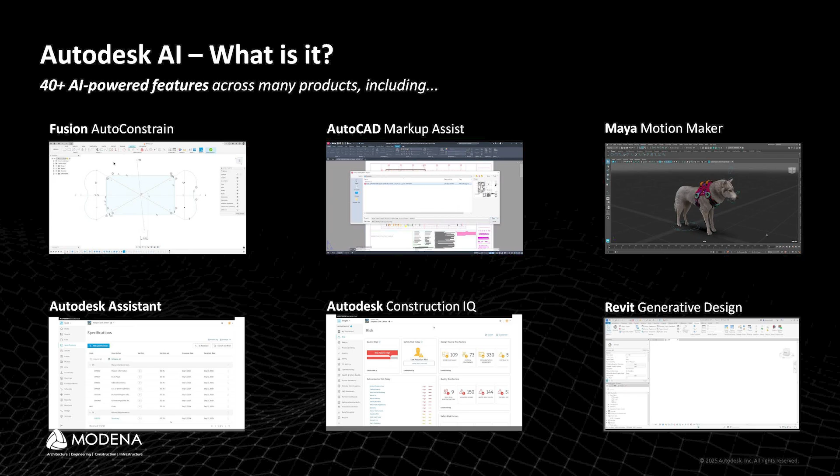The mission really is, as a trusted technology partner for years, to harness the power of AI on behalf of you guys, and a duty to do so responsibly. Over the years, you can see on the screen we've had multiple tools, which I will go through some of them, where we've made use of our design tools and authoring tools and pairing it up with AI. Okay, can I get to the fun stuff? Yeah, okay cool.

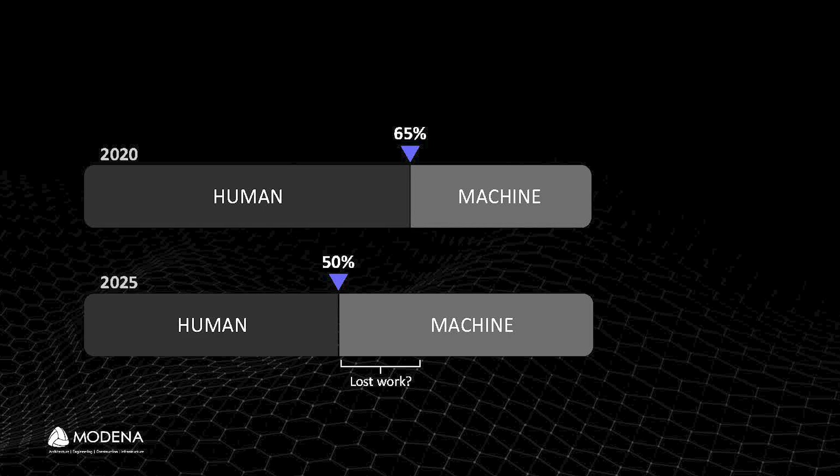What's interesting for me is that from 2020, when it came to design, as humans and designers we relied on AI maybe 35% when it came to our output. As we get more used to AI, most of our workflows become 50-50: human input and the other 50% technology.

And technology isn't just drawing a line and walls in an authoring tool, but giving correct prompts to get a specific outcome from it.

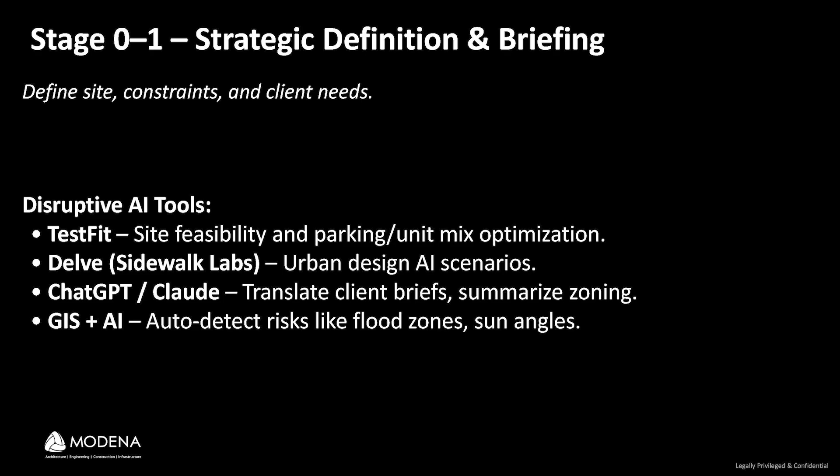In the first stage, when it comes to defining your brief and getting your concept together, the disruptive tools I've highlighted here include one called TestFit. I'll show a bit of that. I also spoke about ChatGPT, Sidewalk Labs, and there's also a platform called Architechtures.

During COVID times, I was lucky to work with a developer doing affordable housing. The guys would spend almost 6 months just value engineering a design that works for what the client is looking for. Getting the brief right and getting it to work is actually quite tough, much tougher than getting the documentation out.

So years ago, let me show you this, connect this thing. I hope it doesn't disappoint me. Let's do this. Perfect. I'll talk over it.

It's a platform called Architechtures. If you want the website, it's architechtures.com.

The idea with Architechtures is for you to get onto a site. You guys can see this, right? Okay, let me just... can't even fast forward it.

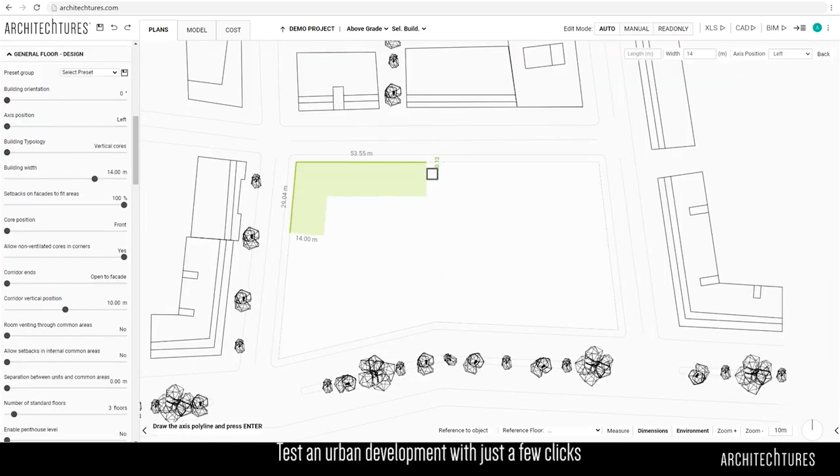It's all online. You go into Architechtures, put in your site location. It does work with South African areas as well. The idea with this is that at an early stage, without having to sit down and put drawings and renders together, you can go on a platform like Architechtures, put in your site and your surrounding context.

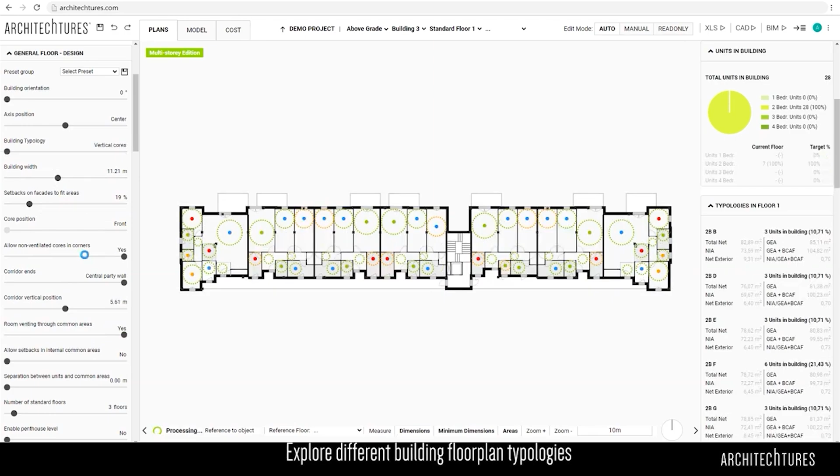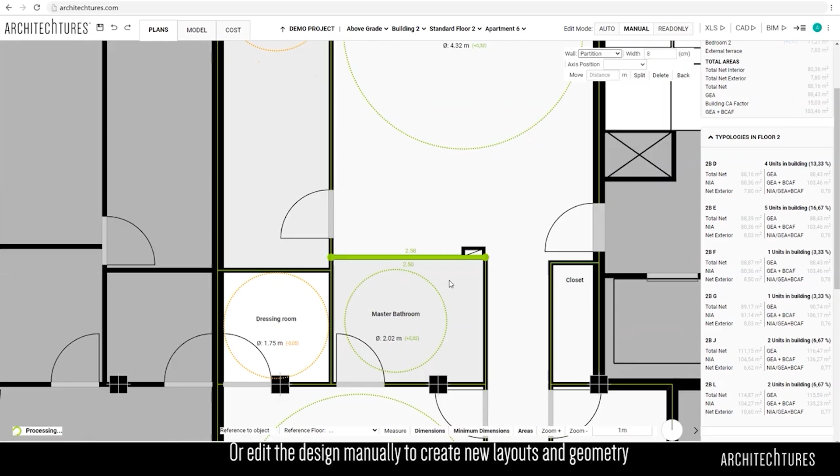Immediately you can start placing down conceptual masses of your residential property in this instance, and it comes in with predefined rooms, layouts and apartments that you can edit. If you look on the right of the screen, those are calculations to work out the cost of the project all the way through how it would operate.

This will probably take like 2-3 days to get to a level where you can define your apartments, define your unit typologies, and get costing to pull through for your first proposals. So it's tools like this that help you plan and put a brief together early on in your project.

But that's the idea with putting a brief together early on using AI instead of sitting down and running through hundreds and hundreds of sketches. Does that make sense?

Okay, just going to go to the next video. And then TestFit itself is a little bit at a higher level.

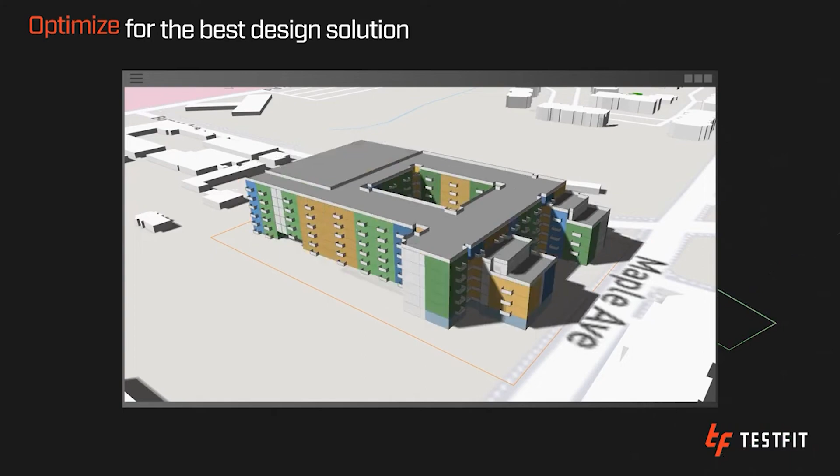As an owner and developer, before they make a purchase or investment on a piece of land, they need to make sure it works and makes sense. Similar concept, not going as detailed as what's happening in the apartments - with this they're able to define unit types, unit sizes, and see if it makes financial sense for a project.

The same with TestFit, this connects back to your authoring tools like Revit and CAD, and you're able to further develop your designs from it. It's literally that intuitive where you can define your site, specify where your building is going to be. It will work out your parking ratios - give it the parking ratio required and it will work out the parking for you.

You take that through Revit and carry on with the rest of your designs. These are just some of the early tools you could use in real estate development.

We're not talking Trump today, sorry guys.

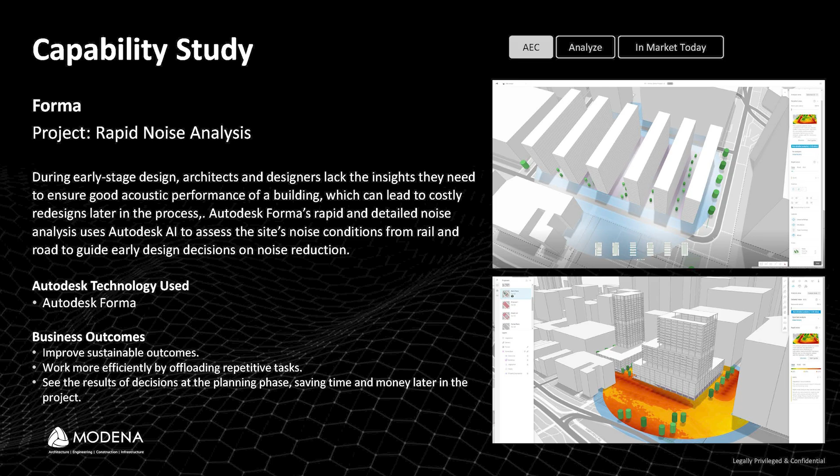Forma, firstly, in the office we're just busy doing this. You guys know we're applying to bring Formula One into Cape Town in a couple years' time. So we're taking that Formula One track, putting it in Forma, and the surrounding buildings wanted to know how much noise this event is going to create for them. Forma is a platform where you can start creating massing, bring it from whatever tools I've shown you earlier, and start doing noise analysis, some wind analysis with your design and your concept. There's some site layout stuff you could do too.

The beautiful thing with Autodesk Forma, like what Autodesk is doing with AI, is just getting access to data. A lot of times when we work in our different software and authoring tools, we were very, 'what version of Revit are you working from? Are you working on Civil 3D?' So the industry is moving away from that type of thinking, where we're just sharing data, and we can make use of that data on platforms like Autodesk Forma to communicate better and collaborate better.

That's the thinking, and that's what's happening when it comes to your design tools as well. Software like Test Fit and Architecture, the one I showed you previously, plug into your Autodesk Forma platform, which is free, and you can start making leverage of those tools as well.

Something that's been going on in the industry as well is carbon analysis and the requirement to get to that 2030 target. Tools like Forma help us calculate and reduce embodied carbon emissions in our projects. You can make use of these platforms, give it input, and it will calculate your carbon analysis for you. Okay, I'm not going to play that video.

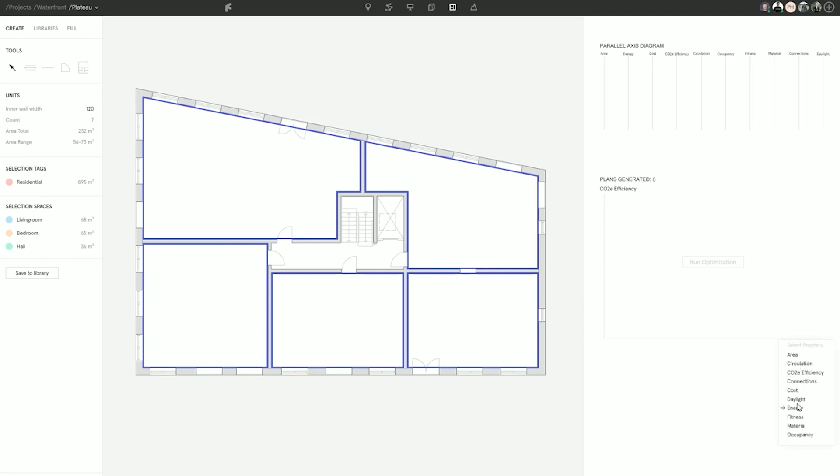On the right of the screen there, that's different layouts it's created. On the right there, that's a small number, that's 8. On this little space here, using AI, in seconds, it's gone through 836 different iterations of that floor plan. You can't do that as a human being. But you can feed it information on what type of apartments you want, how many rooms, etc., go through different options, and then you're able to confidently go before a client and say, this is the most optimal design I have for you for this specific problem. And this is not just on layouts, this applies on anything, exterior work, etc.

Make sense? Okay, cool. So that's quite a nice tool, and also this feeds back into your authoring tools. You can create a CAD drawing, Revit floor plans.

If you look back, there was Hypar on there. Hypar creates families for you. There's a platform where you can literally give it a 3D image, and it will pull out an OBJ file, which is a 3D file that you can put in your designs as well. That's how far AI is going. You don't have to spend time creating components and spending time creating all these heavy families, or you normally get enough projects to do. But Finch is quite a cool tool.

So that's freely available. You can just go to finch3d.ai and then just grab one of those. So this is a little bit pixelated, but what you're seeing on the screen here, okay, that's perfect now.

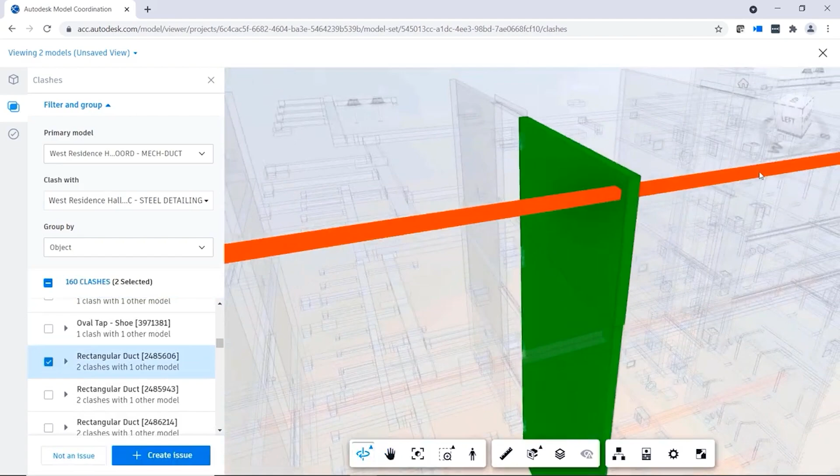Let me show you quickly. In this project, you can see on the screen there are models that have been uploaded to the platform - these are just normal Revit models from your consultant. Immediately you can see which models have major issues. For example, this West Residence model in mechanical has currently got 5,462 clashes. So as the project starts and you're receiving information, you can keep track and manage what's happening or what's going to come in the future before you hit construction.

This is also an automated platform. We use it to coordinate a lot of our clients' projects as well, but you all have access to this information if you do use ACC or Autodesk.

For technical design, I don't have a lot of videos for this, but a very nice tool is Swapp.ai. It converts your schematics or conceptual drawings to construction documentation. You obviously still need to check it - it's never 100%, but it's a nice tool where you can plug into your software and it starts assisting you with documenting your stuff. It's a little bit crazy.

There are ways, there's something coming up very soon - I shouldn't be saying this, but I'm going to say it - it's called Autodesk Assistant. It's already in the cloud, but it will be plugging into Revit and AutoCAD to assist you with similar stuff.

When it comes to AI and all these GPTs and AI agents, it's always better to go to a trusted company. Trust me, there's millions and millions - anyone can go on and create a GPT to do a certain function. So you need to make sure you always go through trusted platforms and trusted institutions like Autodesk. That's how we're doing it as well.

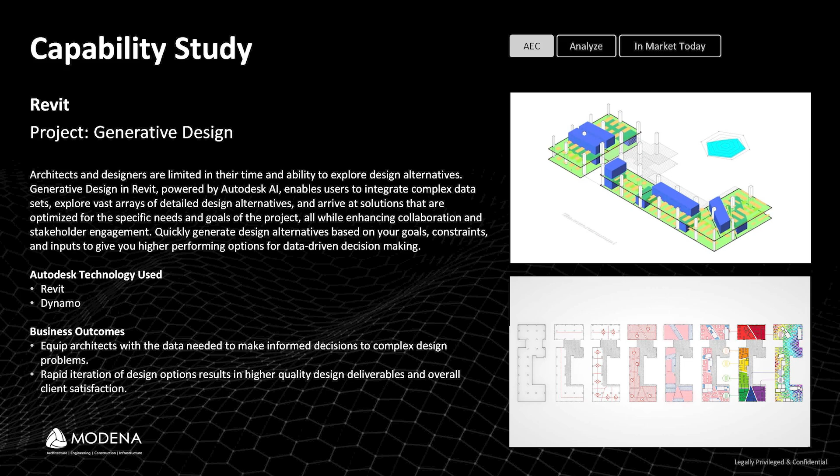We've got generative design - this has been around for a while. I just want to get to almost the end of this. Some of you are Revit users here - do you guys know that on Revit, when you go to your home page, it gives you insight on how you're using your software, which commands you're using the most, and where you can improve your use of Revit?

This is how AI is already embedded in the tools that you're currently using, and this is just on your homepage - when you open up Revit, you'll get that little insight.

Okay, so stage 5, construction. It's a little bit of ACC again - ACC build - with Construction IQ tools that Autodesk has started introducing.

There's a tool we've come across in other projects as well called nPlan. This is mainly for project managers, and it predicts delays on a project based on the input we've been receiving - like if you've got a shop fitter that's taking long, or some codes are not updated, it will be able to predict that for you. Within Autodesk itself, Construction IQ keeps track of what's happening on sites.

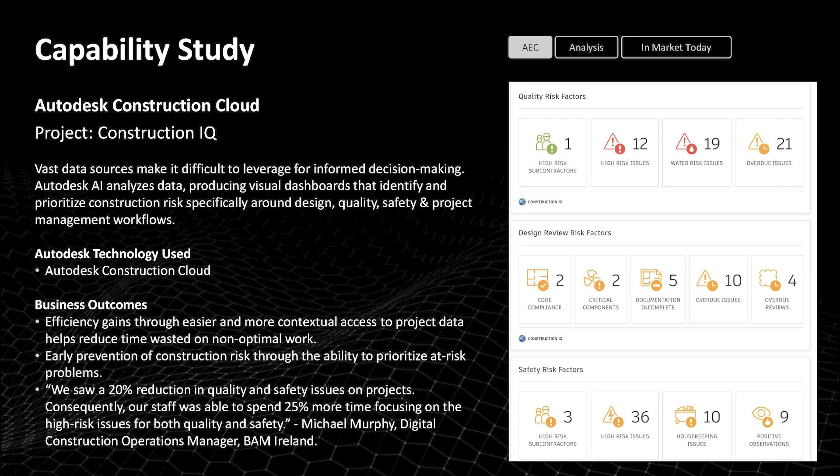Another quite cool thing - when we were busy with a project in Sun City, in Lefika, Calvin mentioned it - it's just 83 units, I think it's 83 units. But the guys, when they were snagging, had over 10,000 snags, so there were almost 50,000 photos in that project. I wish I could open it up.

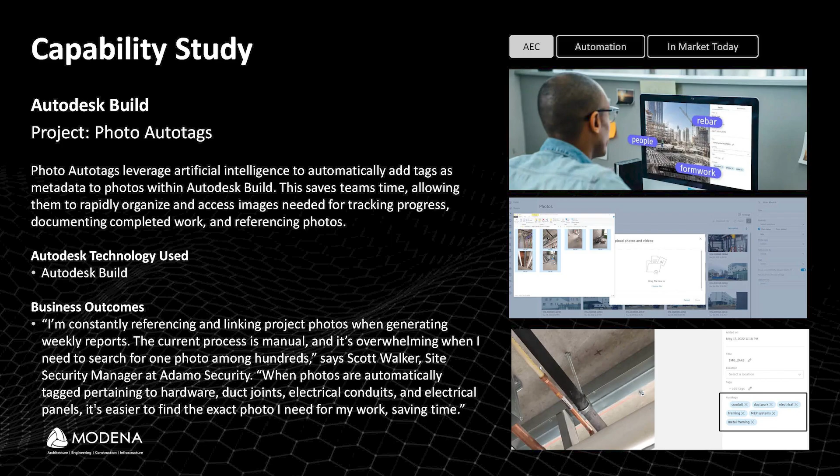Every single photo taken by anyone on the project, Autodesk was able to correctly tag, like tag the door frame, broken tile, etc., without any human input. So the project manager or client could go check all the slabs, go into ACC, type in concrete slabs in a certain area, and it will bring up all the photos and issues assigned to that data. That tagging happens automatically in the background.

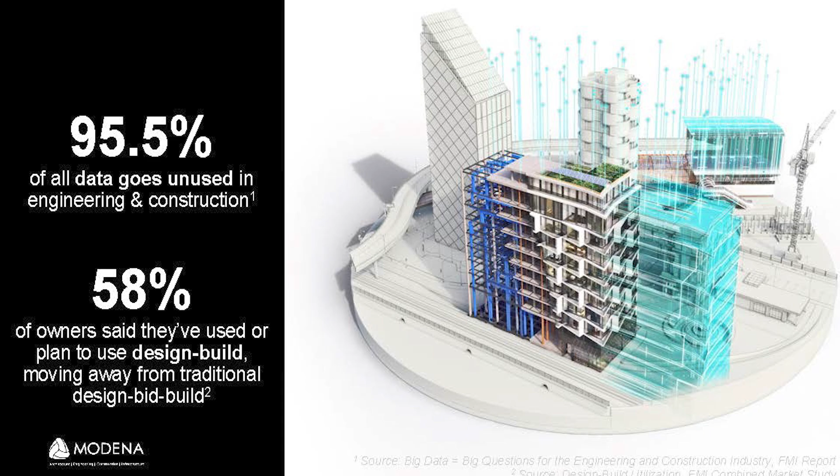As you guys know, 95.5% of all data goes unused in engineering and construction. When we hand over projects to owners, 58% say they've had to move away from design-bid-build to design-build, because they have more control over how they receive that information. It's quite sad that 95% of the information we work on for years to deliver a project becomes unused.

We've actually used this platform in Pretoria, assisting the client, for the Department of Agriculture building. There's a requirement from government to receive a digital twin, which was quite shocking. They're currently using a similar platform to manage and operate their building.

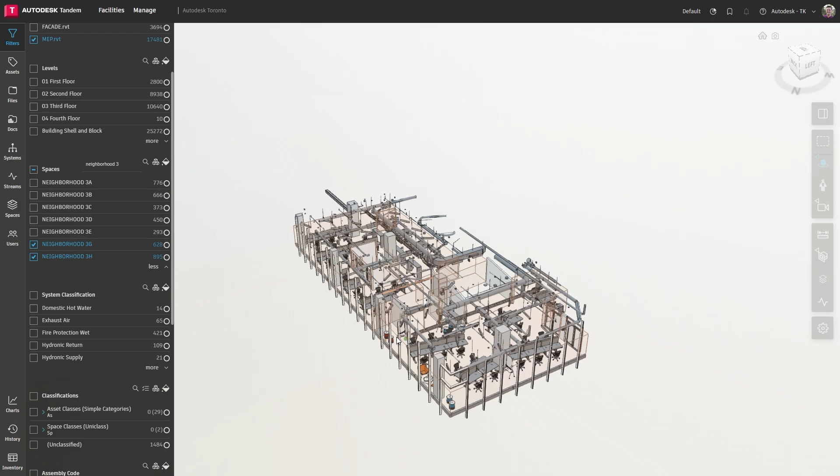So this is Tandem. I'm able to bring up spaces, levels, and assets of a building very quickly. This is real time, I didn't fast forward this, and you can see that's quite a complex building.

You select a specific space, and an operator is able to quickly see what's happening. Interestingly, if a building like this is connected to the internet for IoT devices, guys mainly complain about temperature, especially in this season.

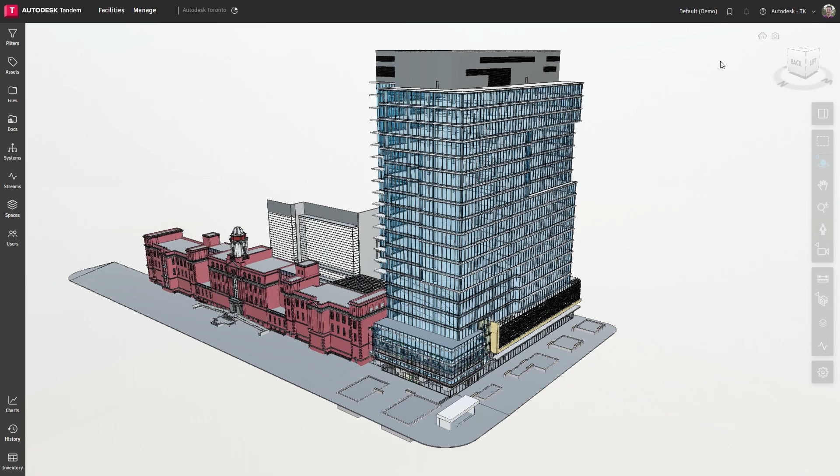The building operator is able to pick up a system, see what's happening with it, and what we want to do with this is basically start predicting the use and performance of that building.

Currently, I won't mention names, but another project in Pretoria, the operator now has to hand over up to 25 years of running a building. They approached this with no data, having operated an 85,000 square meter building for the past 25 years. They need to hand over, and now we have to go back and scan, remodel, and rebuild this whole digital twin for them, because they didn't really consider this type of data.

It's interesting and scary at the same time. But the idea is for us to get what we're familiar with and currently building, a lot of our work is building digital twins, building a digital model in Revit or whatever platform you're using. The idea is to get it to a place where it becomes autonomous, where the models and information we put in there can start predicting the performance of that building, making it easier to plan operation of the structure.

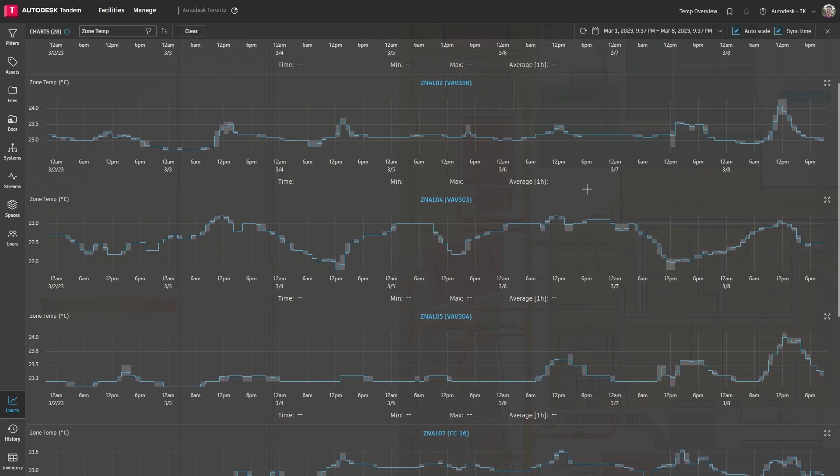What that would look like is just a whole lot of graphs and stuff, but this is what owners require to operate what we create from conceptual stage all the way through to running an asset for like 25 years. In this video, the specific building is calculating the amount of usage in a certain period, and for guys to track actual power usage, it's quite good.

Some of our offices are currently not running on Eskom, and it's also going into residential as well. For a user to log onto a platform and see how accurately they're spending electricity, not the way they do it right now, you can actually start planning ahead and reducing some of your equipment in your house.